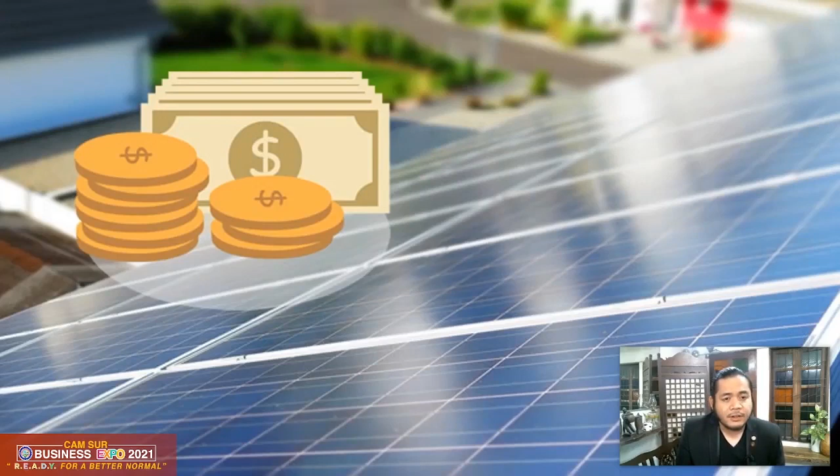Technology-aided green building strategies and concepts may also require a very costly upfront cost. One perfect example are solar panels, readily available in the market, costing around 125,000 pesos to 1.2 million pesos. However, you must account that this will produce solar energy upon installation and will lessen or eliminate your monthly electrical bill consumption right away. Manufacturers and dealers nowadays promise your return on investment within 3 to 4 years, depending on the preferred payment scheme.

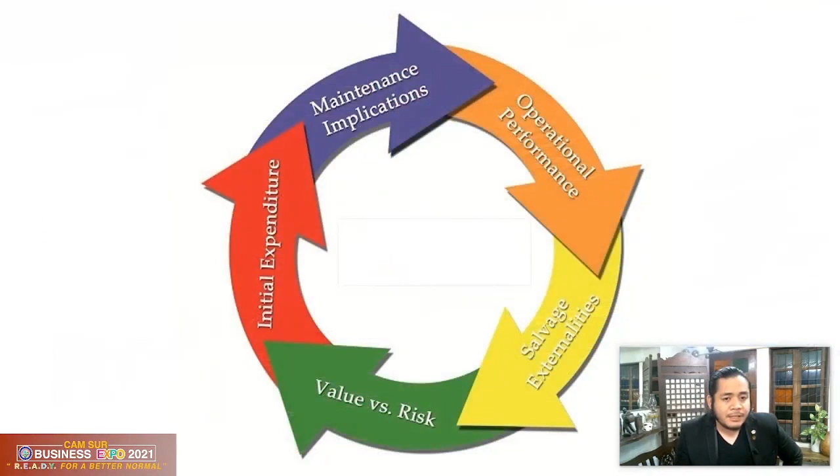Next would be life cycle cost. It is the cost of material over its entire life, not at the time of purchase and installation. This entails how green products and systems are able to sustain themselves over the entire life of the building. For instance, if you sum up the cost of electricity and air conditioning maintenance of a 15-year-old building, you will see that this will be greater than its construction cost, and you will discover the savings that you have earned.

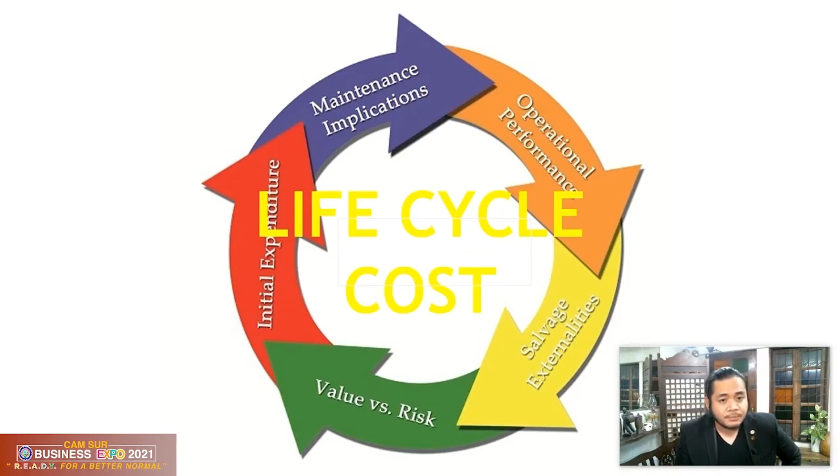The third would be the maintenance cost, which is the cost of having a home. This involves the cost of repairs and service checkups, which sometimes are difficult to manage as these are deemed less pressing. However, many homeowners are caught by surprise since these are not usually part of their monthly budget. Examples include air conditioning cleaning, repainting, roof and drainage, and electrical repairs.

Now, the remarkable benefits of green building are categorized into three as per WGBC, namely the environmental, economic, and social. Green buildings reduce negative impact to the environment by using less energy, also less consumption of water or natural resources, by generating their own energy or increasing biodiversity. As energy efficiency in buildings plays a critical role in reducing carbon emissions, especially in the power generation sector, since at the global level, the building sector accounts for about 36 to 40%, and it has the largest potential for reducing carbon emissions significantly compared to other sectors.

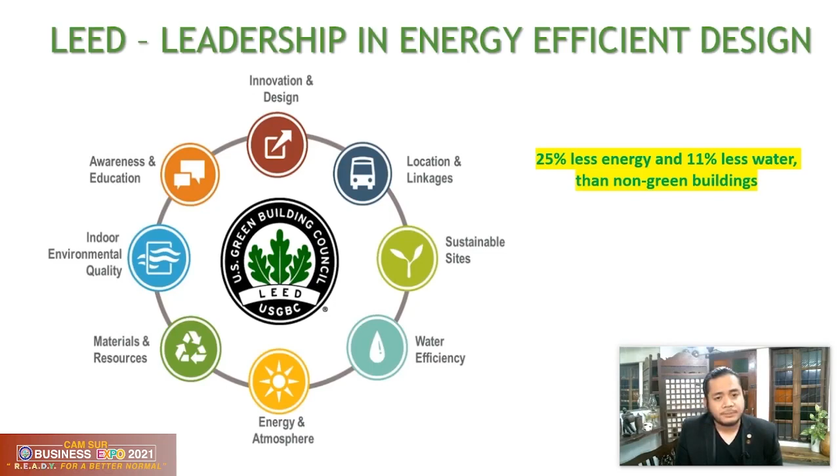LEED, or Leadership in Energy and Environmental Design, is a US-based green building rating system geared towards healthier, cost and resource efficient, productive places and environments, which in turn increases building value, higher lease rates, and decreased utility and operational costs. As for economic benefits, these can be reflected on the utility bills of occupants or tenants because energy and water being used daily are now renewable and sustainable.

Moreover, green strategies can also lower construction costs and achieve higher property value for building developers. Green building could also increase occupancy rates, which will result in more foot traffic, more revenue, and jobs as well. Dodge Data and Analytics in 2016 stated that green buildings command a 7% increase in asset value over traditional buildings.

Now, social benefits are also of the same footing when we include the health and well-being of people who work in green offices or families living in green homes. There is a 101% increase in brain function for people dwelling or working in green, particularly well-ventilated spaces. The American Academy of Sleep Medicine in 2013 stated that employees in offices with windows slept an average of 46 minutes more per night.

Because planning to have your own home or place of business takes more than just knowing the projected construction cost to be incurred by your chosen investment. The more time you spend on planning, considering all the green concepts, strategies, and discussing these ideas with your architect, you are setting the path to sustainable living. And hence, you will achieve good value for money. And isn't it the greatest, noblest thing to be investing in saving the very planet you're living in?

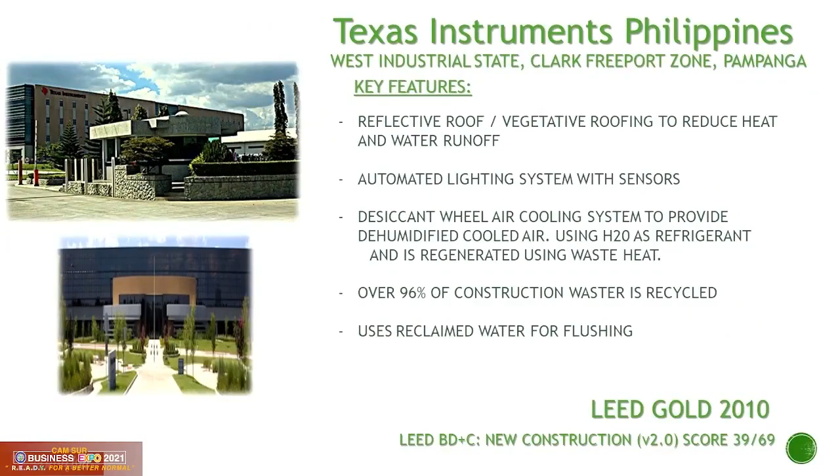The Philippine Green Building Code was developed by DPWH in 2016 to promulgate and concretize green practices for buildings, to use resources such as energy, water, and materials efficiently while reducing the building's impact on human health and environment. Measures such as energy efficiency, water efficiency, material sustainability, solid waste management, site sustainability, and indoor environmental quality are rated thoroughly for new developments with 10,000 to 20,000 square meters of minimum total gross floor area coverage. This code is also applicable to additions, conversions, or renovations of the same area coverage.

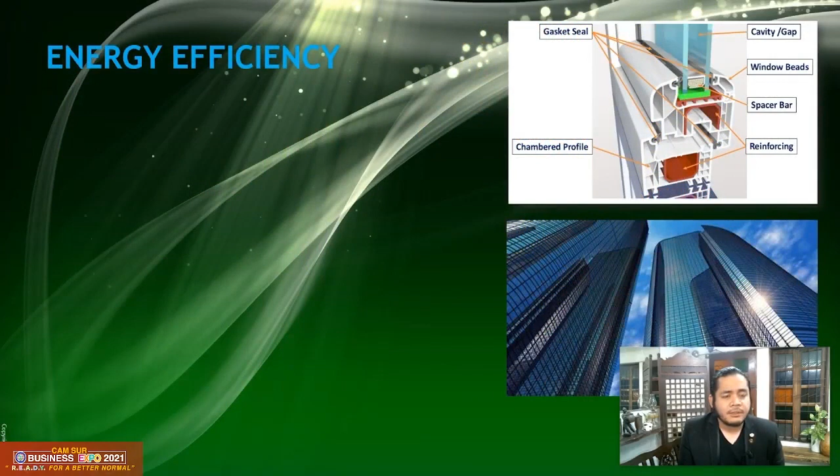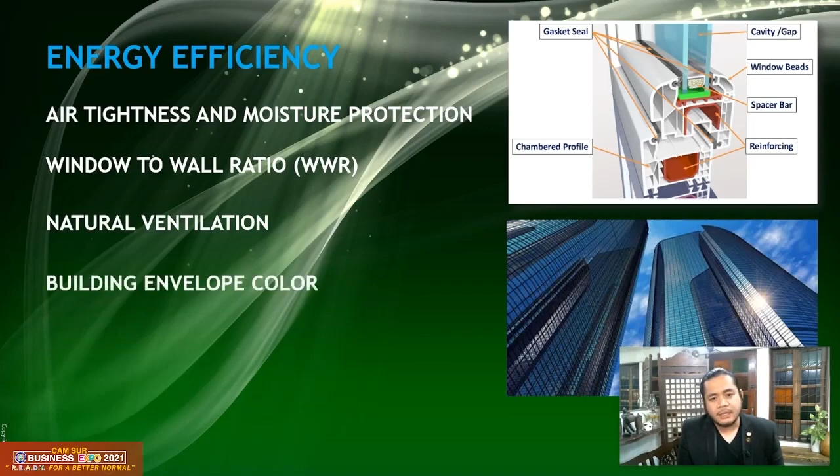Just to give you a glimpse of the things considered for energy efficiency under the building envelope, we have air tightness and moisture protection, which involves air infiltration and exfiltration. We have window to wall ratio or WWR, which primarily focuses on solar heat gain coefficients. We have natural ventilation, or the use of operable windows. We have the building envelope color, which points out the solar reflectance of the building's exterior surface, and roof insulation, which is on the reduction of heat transfer through the roof.

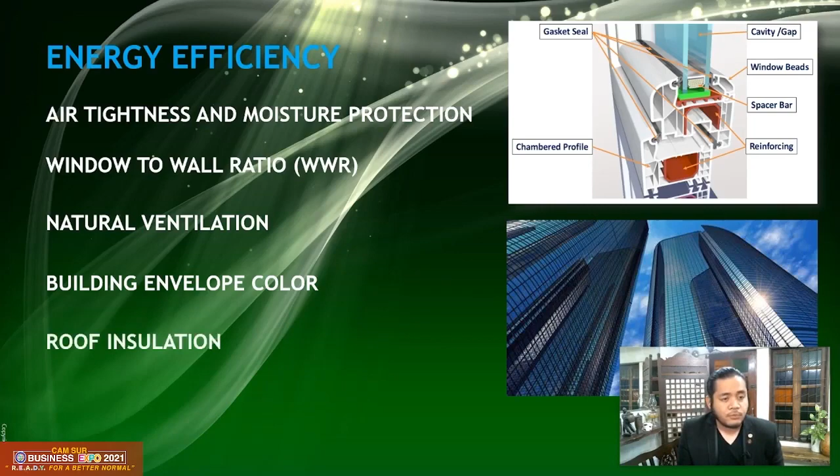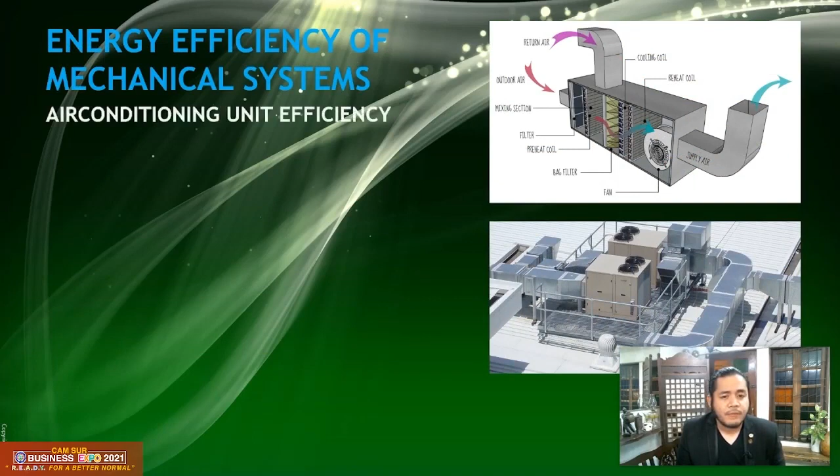Now, for energy efficiency of mechanical systems, this is also a section to be accounted for, starting with the efficiency of air conditioning equipment, energy efficient water heating systems under the PSVARE standards on energy efficient buildings, the variable speed drives and high efficiency motors, which regulate the mechanical system operations, including the enthalpy recovery of exhaust air for fresh air supply. Well, these are all mechanical terms, and honestly, my knowledge of such is not as profound as those of the mechanical engineers.

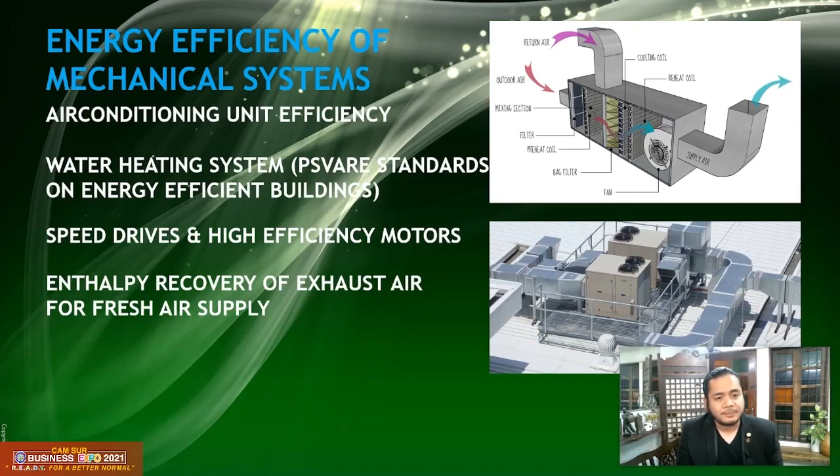For electrical systems efficiency, for this measure, daylight provisions and controlled lighting systems are put into the spot, which concerns how natural lighting is being harvested and how artificial lighting is controlled. Light power density, on the other hand, regulates power consumption due to lighting. We have occupancy sensors or the controlled use of artificial lighting due to demand.

Then the lifts and escalators efficiency, transformers, and the overhead and elevated water storage for the distribution of water, or for the water distribution system.

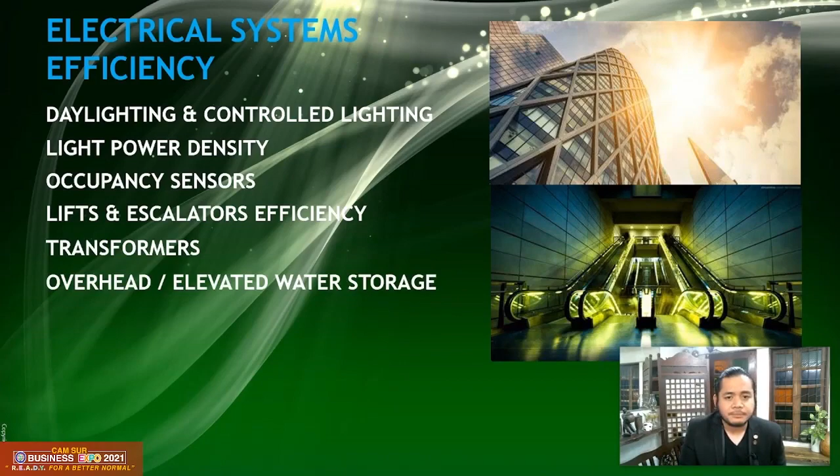Water efficiency includes efficient water fixtures and wastewater management. Under this tab, we will see the coverage on rainwater harvesting as well as water recycling for the resulting water from sewage treatment plants.

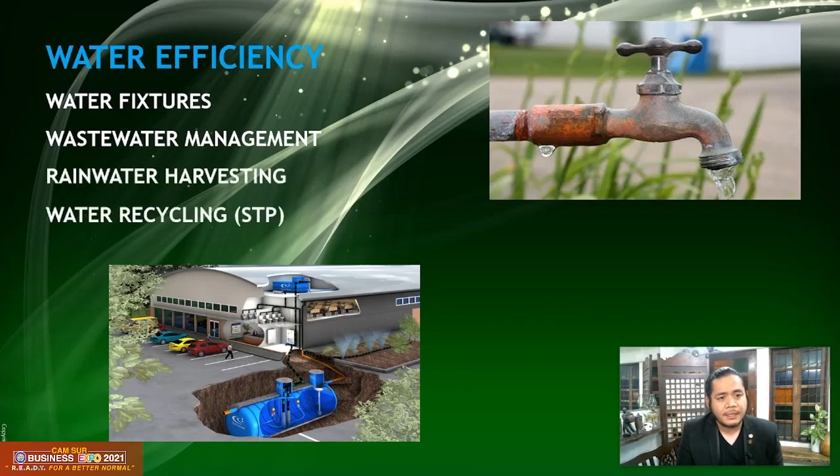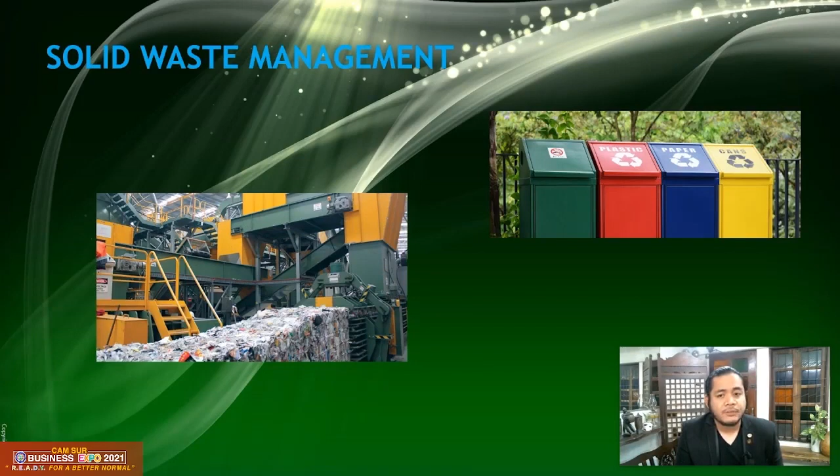For material sustainability, this covers the use of non-toxic materials with the least impact to the environment and to human beings. Solid waste management covers efficient waste management and segregation. This is how material recovery facilities, or MRFs, are being rated.

For site sustainability, which concerns site preparation and earthworks, how to reduce the impact of construction activities, as well as open space utilization, or provision of green and permeable areas to recharge the groundwater reservoir.

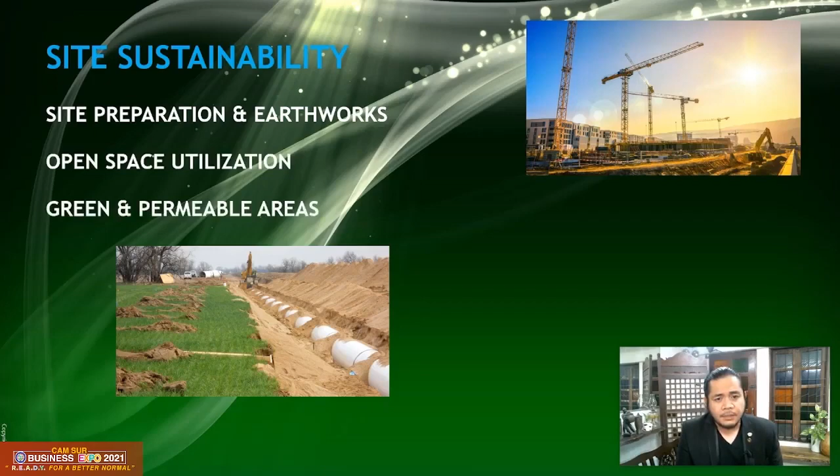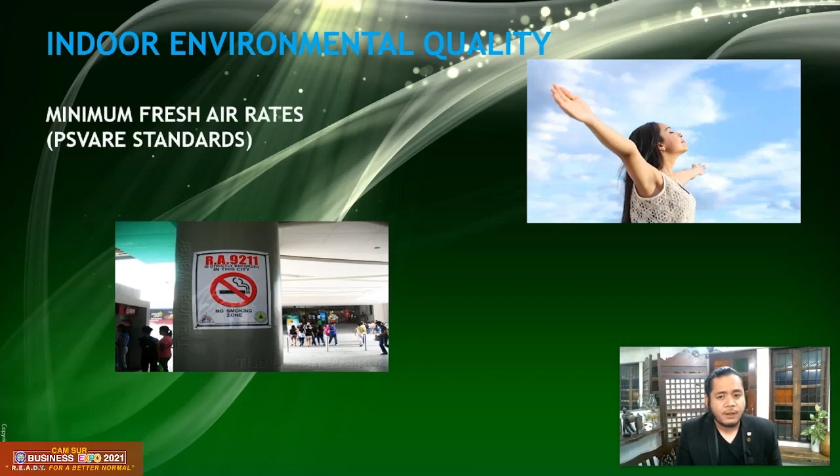Now, for indoor environmental quality, this responds on the minimum fresh air rates following the PSVARE standards. The designation of smoking areas under RA 9211, or the Tobacco Regulation Act, is also considered to maintain good indoor air quality.

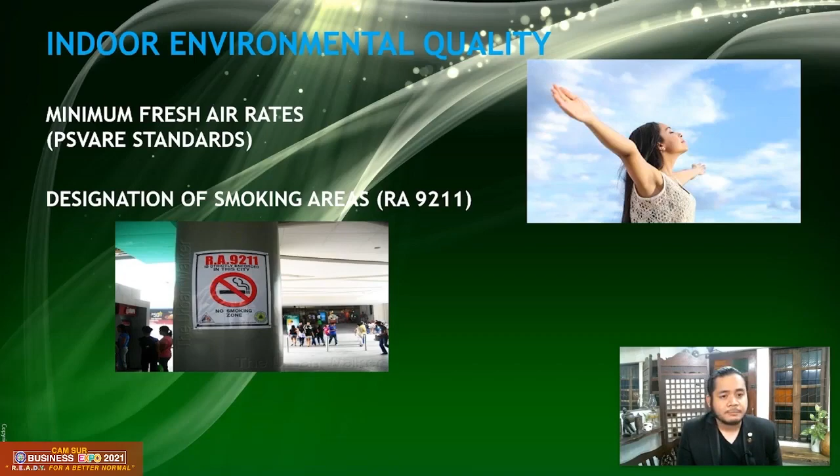The building code is mandatory, and other local zoning ordinances from the LGUs may still be implemented. But there are also other voluntary rating systems like LEED, BREEAM, and BERDE, GREEN that also have specified ratings for green building practices. A checklist is used by the local building official for all the trades to carefully review and assess the project's

conformity with the code. In addition to detailed drawings, documentations, or schedules may be deemed necessary under the areas of concern. Ocular inspections, as well as as-built plans, presentation of product labels and brochures for the materials that were installed, are also required in the occupancy clearance process.

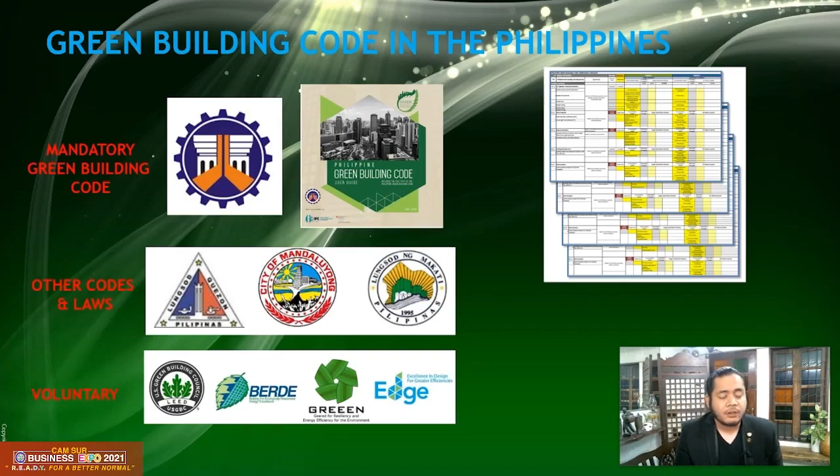Green building basically is the use of common sense to have a better quality of life. You may never know it, but you are already practicing in your own home the key concepts of green building. But nevertheless, here are some of the green concepts and sustainable ideas you can apply.

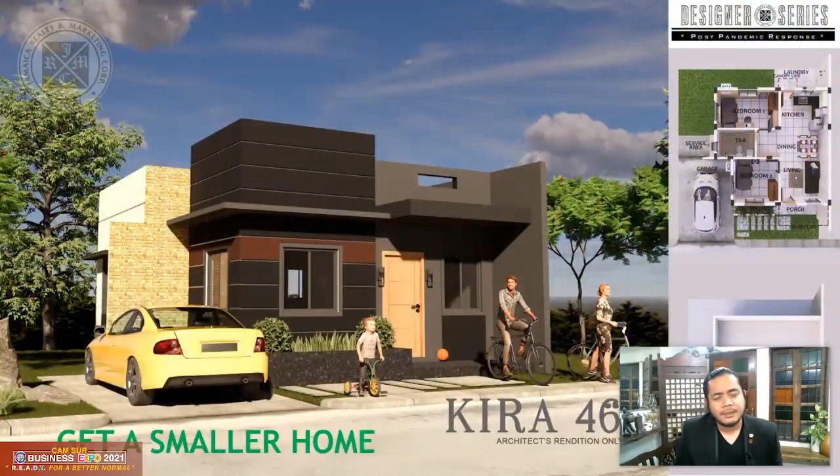A good planned house without wasted spaces is easier to maintain. Big spaces with high ceilings equate to more expensive construction and operational cost. One thing to consider is that big rooms require more energy to cool. You may need to double the capacity of your air conditioning units for that matter.

Unless you are planning on making these big spaces usable, like a guest room that can be converted to a home gym or home office. Big houses may also have longer hallways to service the rooms and areas within, and without natural lighting, these may also require more artificial light. So smaller homes are indeed more social than bigger houses, as these have positive effects on the well-being of its occupants, and it simply brings families even closer.

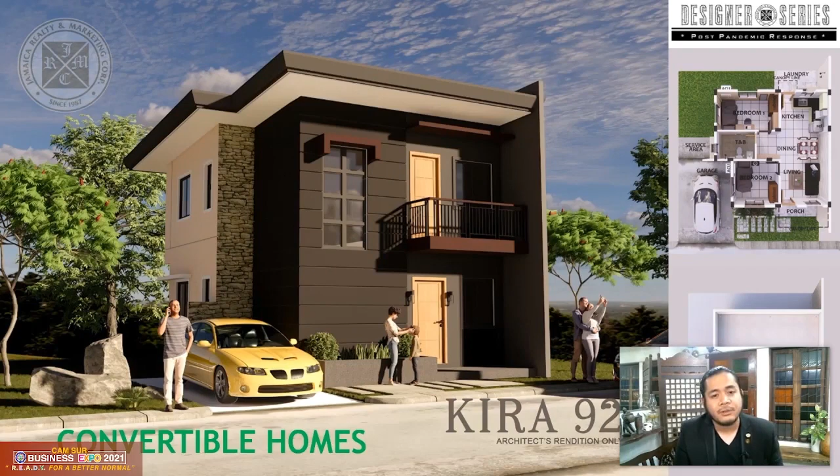If you ever consider having additional rooms for your home or office, did you know that the sustainable way to do this is to add more floors than to sprawl out, because this reduces the impact on the biodiversity of your site. But if this cannot be done, a development on stilts with a semi-permeable ground is also a better path to take.

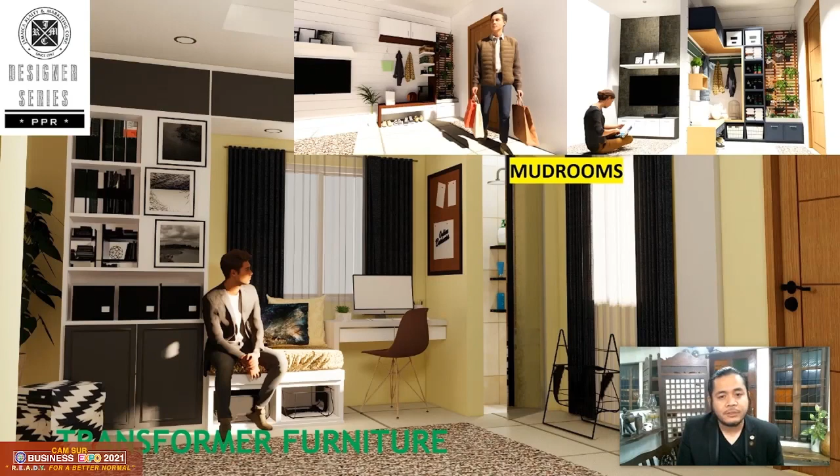Your architect can also introduce convertible options, from movable partitions or even a completely convertible deck. Transformer furniture is more than just a fad these days, but rather an obvious solution for multiple purpose requirements. The cost upfront does not necessarily need to be high if all the right ingredients are geared to serve its purpose. Imagine conducting your business within the safety of your home, as your living room transforms to another purpose. You can never put a price on that, right?

By making provisions for proper waste segregation areas or for storing recyclables, you can advocate reuse, reduce, and recycle. As simple as using the food waste from the undersink bucket as compost for your garden is already considered a sustainable act.

In a broader measure, the reuse of salvaged stone or reclaimed wood from old demolished structures can add character when used as a building material. Defects such as rust stains, nail holes, and chip surfaces are perfect for distressed interior concepts and timeless qualities.

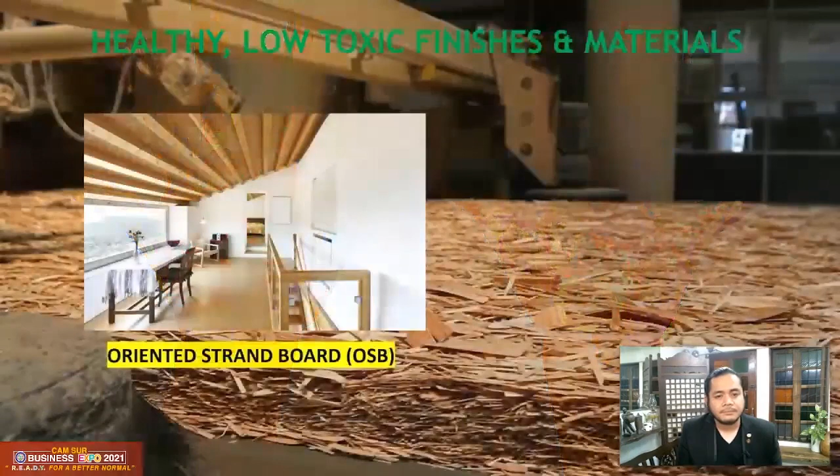The use of formaldehyde-free oriented strand board, or OSB, or a type of engineered wood like particle board, is an efficient alternative to plywood, as these are made from low wood particles and also have a distinctive finish.

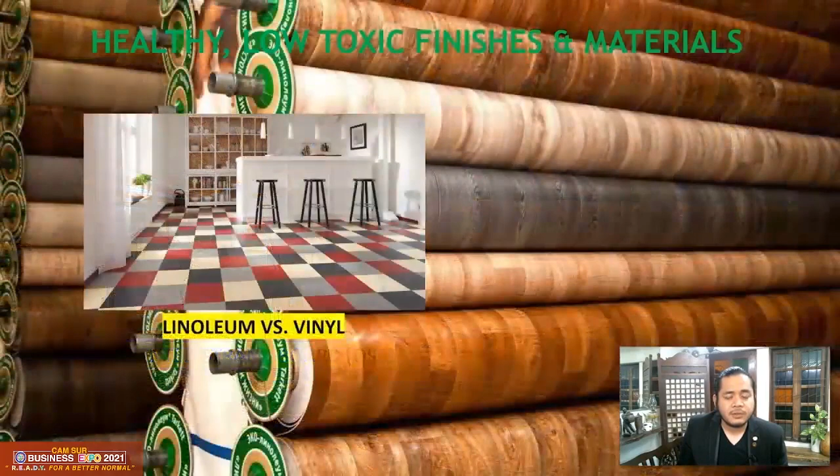You may also consider the use of natural linoleum over vinyl flooring, as the former is made from cork and linseed oil. The latter, on the other hand, is petroleum based or made from chlorinated chemicals such as PVC. So linoleum is more eco-friendly, low toxic, less flammable.

Antimicrobial, easier to repair, and it can last up to 40 years, whereas vinyl typically lasts about 7 to 10 years.

But the cost may vary as per design, and other features such as water resistance will also be considered for the price. Now, vinyl has replaced linoleum in the market because of its comparable durability, and it is more DIY friendly.

Light colored roofing reduces the heat buildup through the roof, increasing thermal comfort for the users and decreasing the need for air conditioning.

Stone coated metal roofing is another option. It's lightweight, fire resistant, sound absorbent, and durable to stand all weather conditions.

Energy efficiency is the cornerstone of any green building project. The use of energy in its generation contributes mainly to air pollution and climate change. Using renewable energy lowers utility expenses, and consumers can reap its benefits or allot the savings to other expenses.

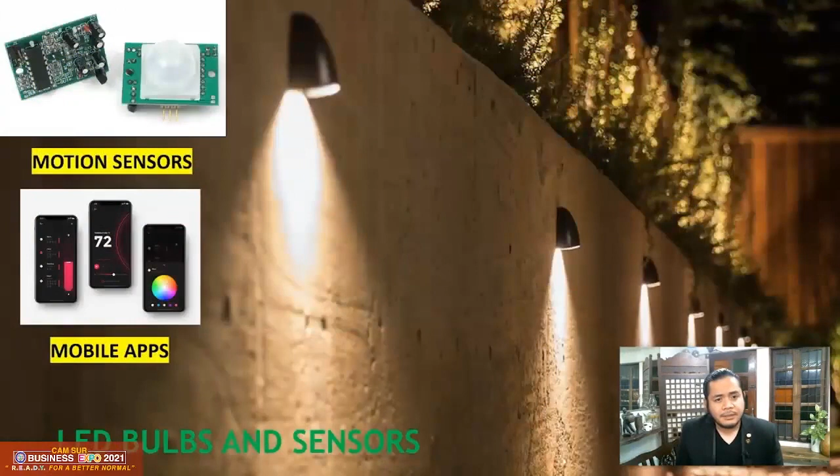So many years ago, CFLs or compact fluorescent lamps replaced the incandescent bulbs. CFLs became a profitable investment for every home because of its ability to produce an equivalent amount of light with lesser power generation. In the same way, LED bulbs started to flourish a couple of years back when they became readily available in the local market for consumers. But the objective remains the same: more light coverage, less power generation for a cheaper price.

Now, some LED bulbs are equipped with built-in sensors to start and cease function only by demand. So lighting and power outlets can now be controlled with your smartphone through a mobile app. Again, an energy efficient concept that you can consider.

Windows, being part of your building's envelope, are as important as how you address the roof. They play a major role in energy efficiency, as here in the Philippines, solar heat gain is one factor in addressing the thermal comfort of the indoor environment. It is used to determine the capacity of the ACU to be installed, or the design of the HVAC system for large scale projects.

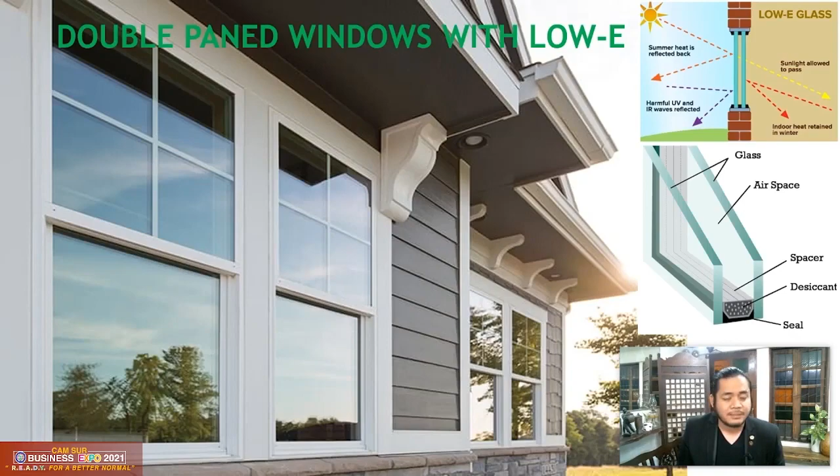Architects, engineers, interior designers are only some of the key players in the architecture, engineering, and construction industry. Their years of valuable knowledge and specializations are vital in making all green design strategies work. From the initial phases of design to the turnover of each project and even up to its operations, architects, as the prime professional, know how to provide design solutions to effectively address a design problem and how to make it work with all trades.

He or she also determines what is economical and what is not, and can translate the client's vision to reality. The architect then consults structural engineers for the skeletal facets of a building, in the same way as seeking consult with electrical, sanitary, and mechanical engineers for matters concerning the electrical, plumbing, fire protection, and HVAC systems.

The design of specialized furniture, on the other hand, can be successfully done through an interior designer. Aside from these key players of the AEC industry, building owners also need various professionals trained in their field of expertise to address concerns of the project, like doctors, landscape architects, accountants, lawyers, IT, and even HR professionals.